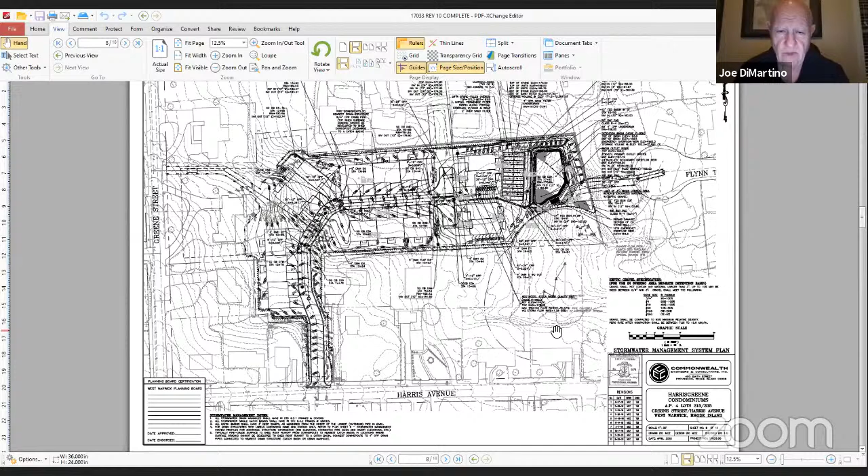Sure. So the project has gone through a number of iterations, as you can see by the number of revisions. A number of those were revisions made by the client's request to optimize the design. Other revisions were made to respond to comments from various agencies with jurisdiction, including West Warwick Sewer Authority, Kent County Water Authority, and RIDEM. I'm not sure which revision you're looking at right now, but I recall one iteration where we had a stormwater basin and then another stormwater basin, and it was tiered.

I'm going to back up a little bit to give an overview of the site itself to create some context. The topography of the site runs generally from west to east. It's fairly significant—we're on a hill. That actually made it fairly straightforward for us from a stormwater management standpoint for collection and conveyance. Everything is flowing where we want it to.

As Sandy alluded to, a prior iteration of the master plan had some underground infiltration chambers and some general unengineered proposals for stormwater management. We've come back with a different configuration and different building units. That has moved everything further to the east in order to fit the various proposed units, the 16 units, and for us to locate our infrastructure—because our goal is to capture, treat, and manage the stormwater runoff from the entirety of the site, which means we need to be close to the bottom of the site.

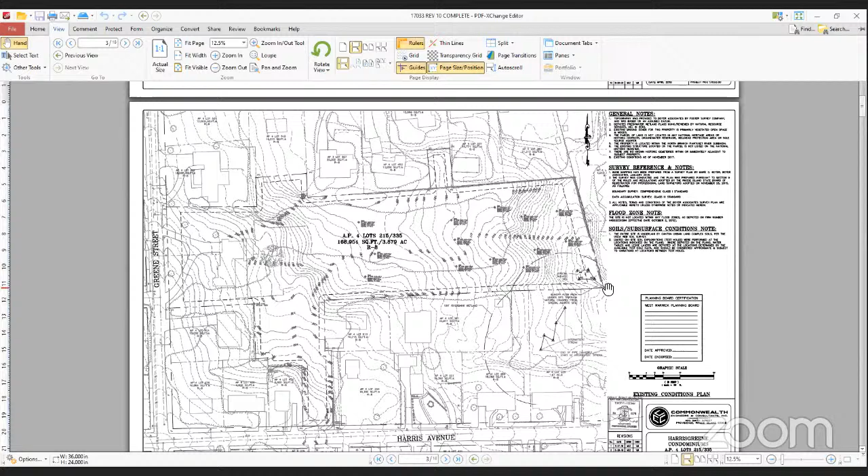The stormwater patterns are generally running from west to east, following the topography, and eventually gravitating towards this southeast corner. There's a small channel that leaves the site in the southeast corner, and off of this viewport, it runs down between the yards for, I think, 3 or 4 houses before making its way into Flynn Terrace.

So what we've done with our stormwater management—our target, or really our obligation—is that when we come in and do this development, with impervious area for the roofs, the common driveway, and individual driveways, all of that is going to generate more runoff than is currently leaving the site right now, more peak flow rate. It's going to increase how quickly that volume of water is leaving the site.

Our obligation is to mitigate that, meaning we have to at least match the current flow rate leaving the site with our proposed design. We do that by routing it through various structures and holding it up long enough so that while the storm is going on, we're building up storage in these structures, and the water is being metered out slowly at a rate less than or equal to what would currently come off the site.

So I'm going to pop over to another—oops.

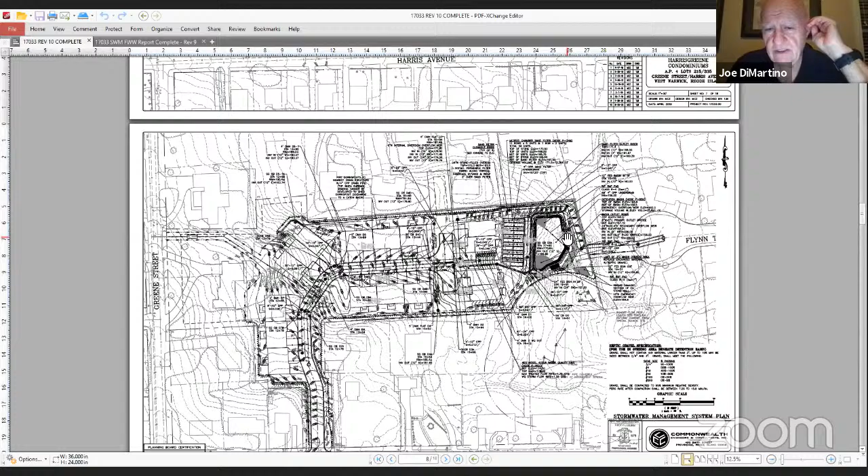Okay, well thank you Mike. The question on the eastern boundary: there was a stipulation on the original master plan approval that it was going to remain in its natural state. To me, it doesn't make sense that it would remain in its natural state, but...

I'm looking at your stormwater retention area, and it seems as though there's a pretty steep embankment east of the detention area, between the detention area and the property boundary. And you have piping going through there. I don't know, it's storm drainage, maybe sewer piping, perhaps. It's hard to see at this scale. But so my question really is at that point, right?

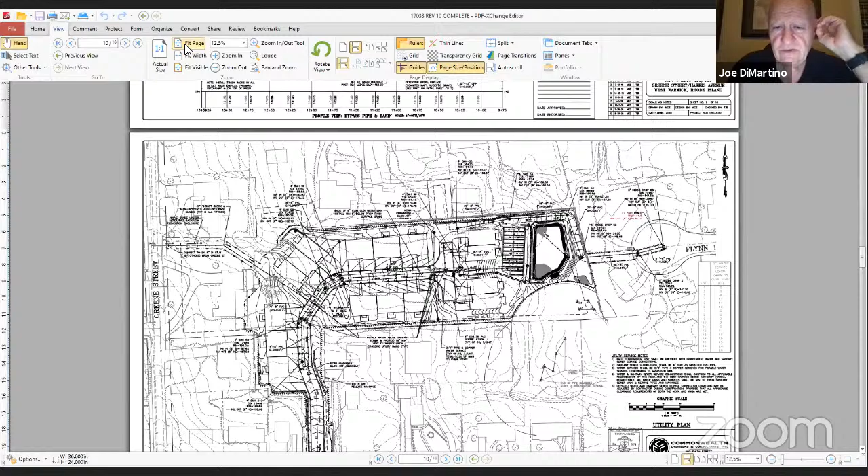Okay, all right, good, thank you. That helps. So I just want to make sure that we're consistent with what the original master plan decision required, okay? And what you have may in fact be better than what they required. I'm not sure, but I'm not sure why this was included. Again, this was done originally in 2007, 13 years ago, long before any of us were on the planning board. And so it's new to us, okay? We just need to make sure that what was on the original master plan is faithfully being honored here, okay? And so that's why I'm asking the question, all right?

Joe, if I might interrupt a moment. And subject to Mark's agreement with me, your master plan came in under a conceptual version. I think I heard him state that even the layout of the units is different this time around. So while you can accept the guidance of the master plan, as long as you stay with the basic concept, you have the ability to make modification to it. Mark, am I correct in that?

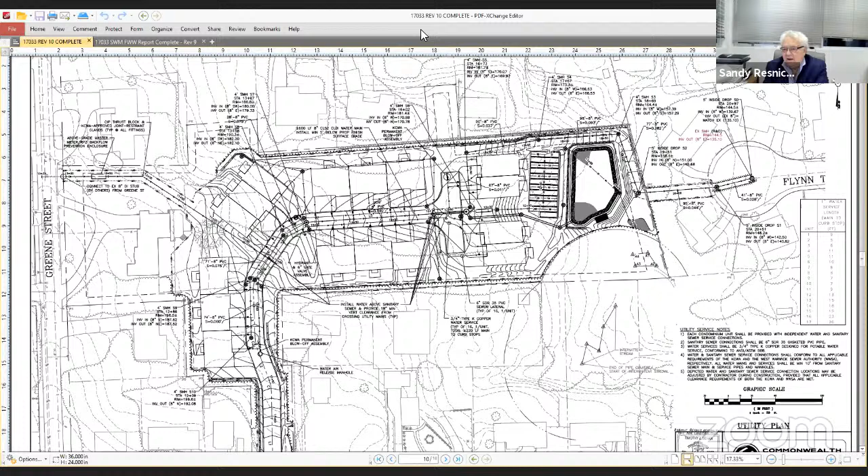And that's another example of what you were talking about, the private sewer tying into the town system. So we want to make sure the condominium—Sandy Resnick, we want to make sure the condo association has that language. It's more common than not that you'd have language like that in a condo association to give it the right. So that's not an issue.

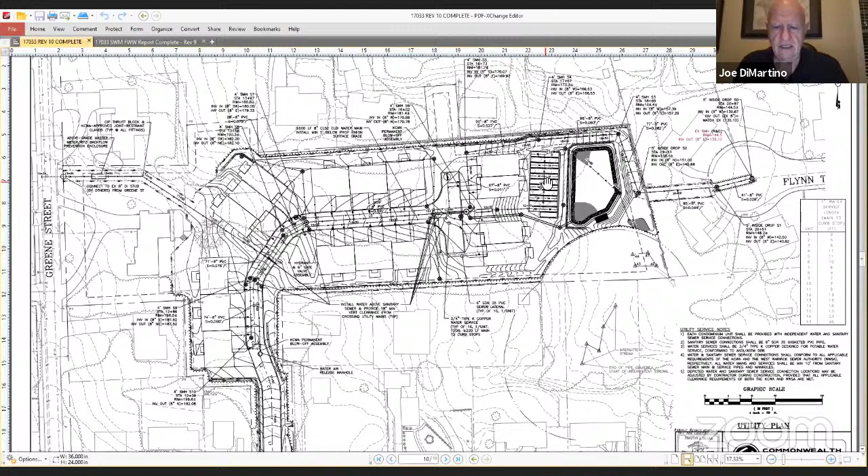Okay, great, Josh, do you... should I stop sharing my screen and turn it back over? Anyone else on the board want to continue to see the shared screen? Well, I do have a quick question. Okay, Josh, go ahead. No, this is Joe Gardosic. Oh, I'm sorry, go ahead. Can you guys hear me? I can hear you, it's coming through on your phone I think, Josh. Oh okay, yeah so can you hear me? Go ahead, Joe Gardosic, go ahead.

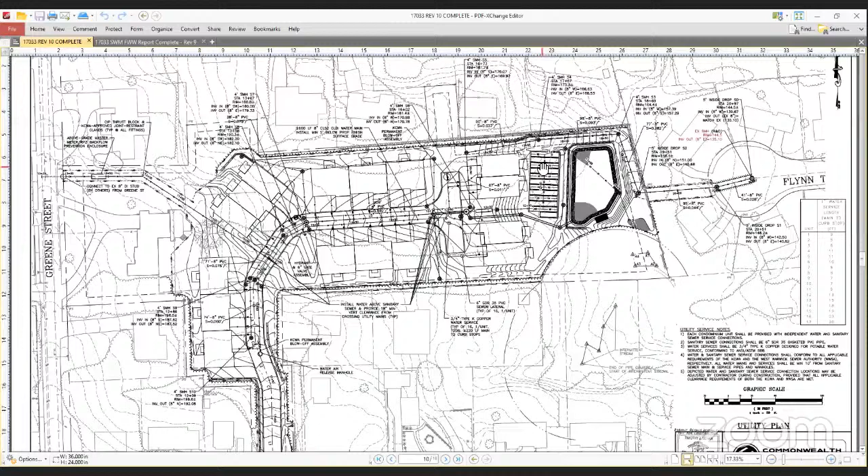Mike, do you have a feel for how much ledge may have to be removed at the sand filter and the detention area? It seems like there's a lot of ledge on this property. There is an appreciable amount of ledge underlying the site, and a good amount will need to be removed, particularly in the sand filter area. It flattens out a bit elsewhere so we won't have as much there, but there will be some rock removal in this area. We don't really know at this point the nature of it—whether it's hard ledge or rotten rock—but test holes have located ledge.

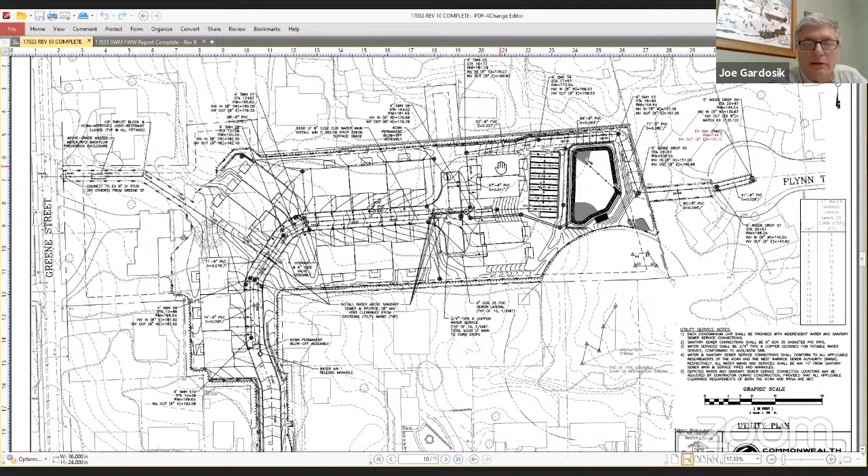Do you have a feel for quantity—500 yards, 800 yards, 1,000 cubic yards? I can get that for you. I don't have it off the top of my head and don't want to give you an incorrect number, but that's certainly something I can derive. We've got profiles and sections through the entire site, so I can come up with an approximation for you.

So Mike, my assumption is that the units will not have basements, but will be slab on grade? That is correct—we're not looking to go down any further than we need to.

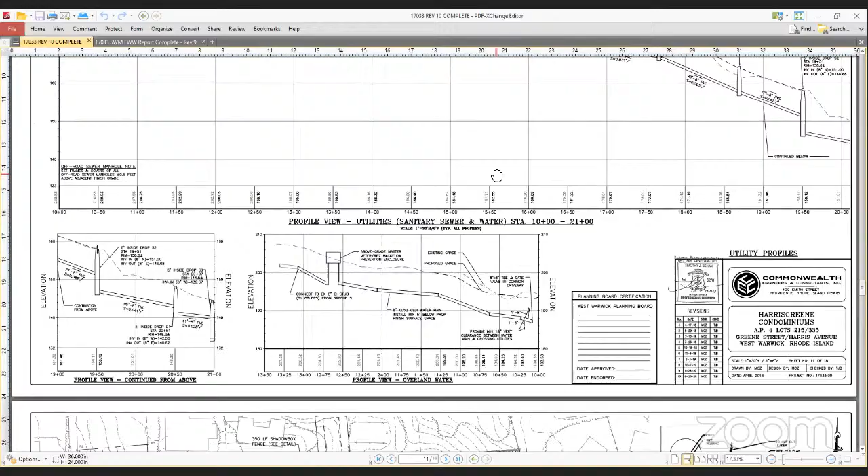All right, Josh, were you trying to get in? Yeah, I'm looking at sheet 17 of 18, at your Redi-Rock wall installations—that's my biggest concern, the manholes and obstructions near the Redi-Rock walls.

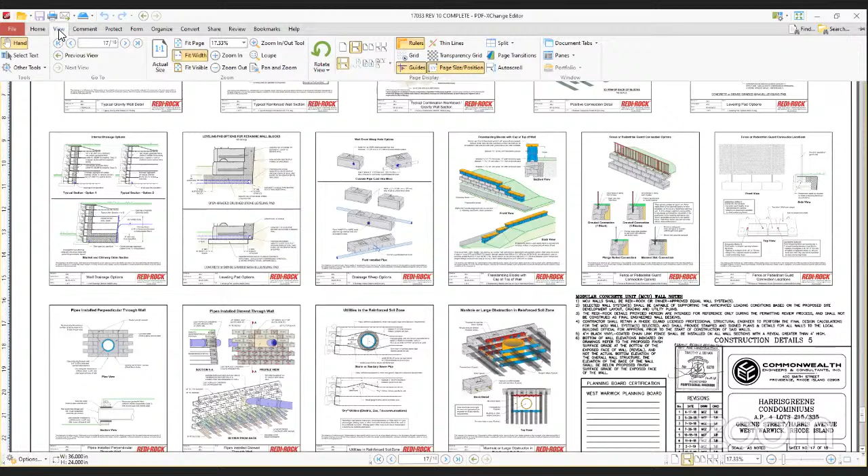I mean, it's standard, but I see more failures of walls than anything else. And with ledge being there and the retention of water, is that to be construed as the Redi-Rock wall being built around near the retention, further away?

Well, I'll go back to the plan sheet and show you where we've got that. The first thing I'd say is that Redi-Rock is a suggested system, not necessarily the one the developer will end up using. We present it because it's pre-engineered, and they have different details for various conditions and configurations.

So, how acidic is the soil around there? Have we done soil samples? My concern is that most Redi-Rock walls that fail do so because there's deterioration of the parts that hold it together, and then you get a good boatload of rain, and there's a failure of that wall.

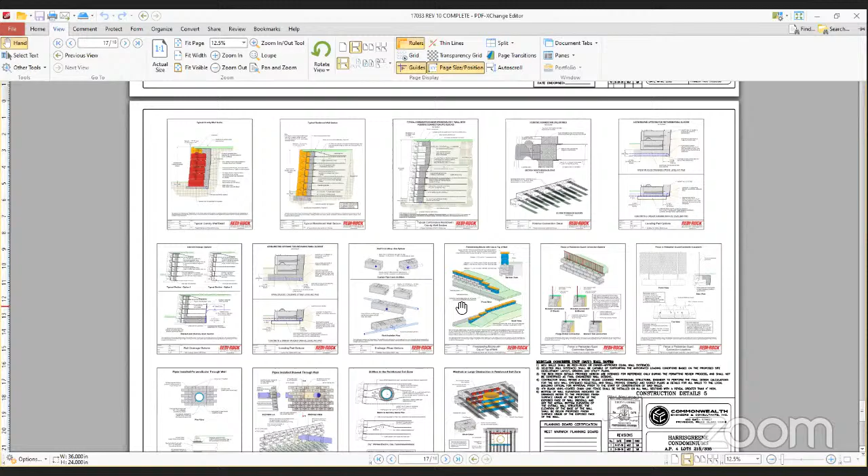I don't know if this is the point where I can be talking about this, but it's a concern. Looking at the material makeup on some of the details, it doesn't make me feel warm and fuzzy that some of that galvanized material, if scratched, can corrode away. When those rods corrode and you get heavy rains, you can have a failure not only of the system, but a failure of the wall. I don't know, I've just seen it happen all too often.

I don't know if this is the forum where we can talk about this, but now you're saying you might not use this system, you might use another engineered system. I guess it was just a question, because I don't think some of those rods and materials used are going to last long, depending on how acidic the soil is.

Go ahead, Mike. That's not generally something we do advanced testing on, the acidity of the soil. It's not to say it can't be done, but it's not something we've done already on the site, so I can't tell you if it's particularly acidic or not.

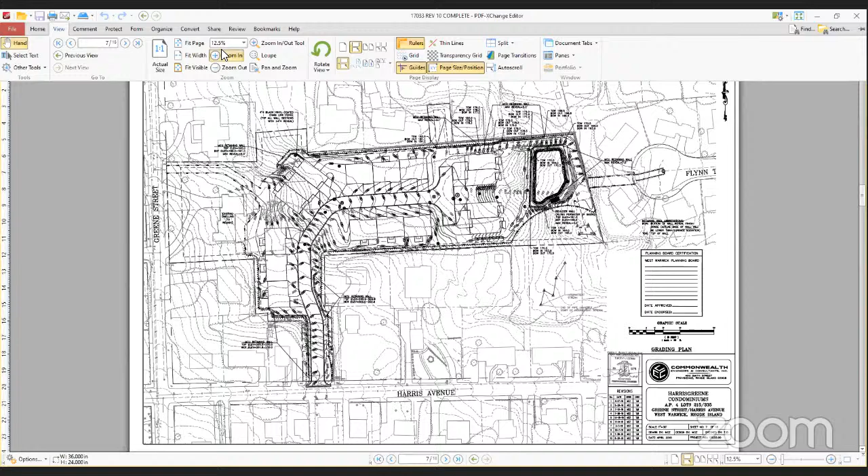I can say that I'm on the grading plan now. I'm going to zoom in a little bit. So on the grading plan, wherever you see the term MCU, that stands for Modular Concrete Unit Retaining Wall, and Redi-Rock is one of those types of systems.

So it's basically blocks that you put in. If you look at the plan, you can see where we've proposed to put them where we need to. I've got them only where I need them, because if I tried to grade out with just natural material without a more vertical surface or face, I would go beyond the limits I wanted to establish.

So I've got one along here, along the driveway. You can see, looking at the elevations, TOW is top of wall, BOW is bottom of wall. Generally speaking, we're not talking about tall walls, really. They're fairly modest through that area.

So as a general rule, they don't have any of those reinforcement materials exposed. Something significant would have to happen in order to break the rock and expose that.

Okay, we have another one over here. Again, we're looking at modest sized walls, generally. We've got one along here, one along here. So we're talking about 4 to 5 foot high walls, not the massive ones you might see, like the one that fell over.

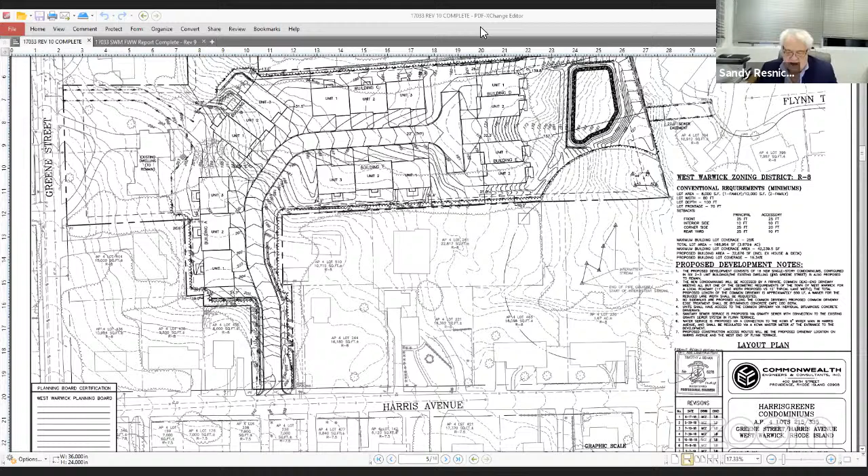Okay, so Sandy, you got more? I do not. Okay, all right, thanks. We're certainly open to any questions.

So I just want to ask if there's anyone that wants to speak, it's a public hearing, you've presented your case. Does anyone want to speak in opposition to this development or this plan? Actually, the development has to be, the master plan was already approved, so anyone wants to speak in opposition to this? You have a couple members in the public, Joe.

Okay, Toby is the first one. You want me to allow them to talk first? Sure, let Toby talk. Okay, Toby can unmute himself. Good evening, how are you? Good, thanks. State your name and address, please. Toby Miller, 44 Woodside Avenue. Swear to tell the truth, the whole truth, and nothing but the truth? Yes, sir. Thank you. All right, Toby, go ahead.

My question was in regards to the 10-foot buffer. I see and understand that there's going to be a retaining wall on the north side of the property running eastward down to the new water recovery system. And I'm curious, my question regards the 10-foot buffer area. I understand there's going to be a passageway or a driveway for maintenance. What was that planned to look like?

This is Mike again. Toby, so that goes back to a question that Mark had raised about what the material for that access path would be. I'm going to call it an access path because when you say driveway, you get an immediate image of something paved or gravel. That access path is going to look like an extension of the lawn area, and it will be uniformly graded, so you'll see it sloping down, but it will look like grass and be mowed regularly.

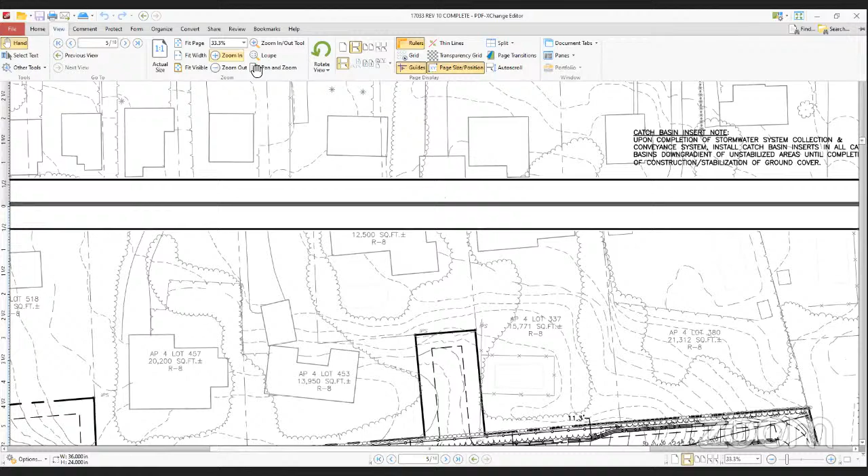So we've got a retaining wall here, and I don't have the grading plan. This is the layout plan, but I can go to the grading plan to give you an idea of how high that wall is.

And then we are proposing, and will provide, Justin would provide the shadow box fencing along here. As you can see, there is some room, and the fencing location, there's nothing set in stone about that. So it would be possible to locate this closer to the back of that wall and then put in some plantings between the fence and the property line.

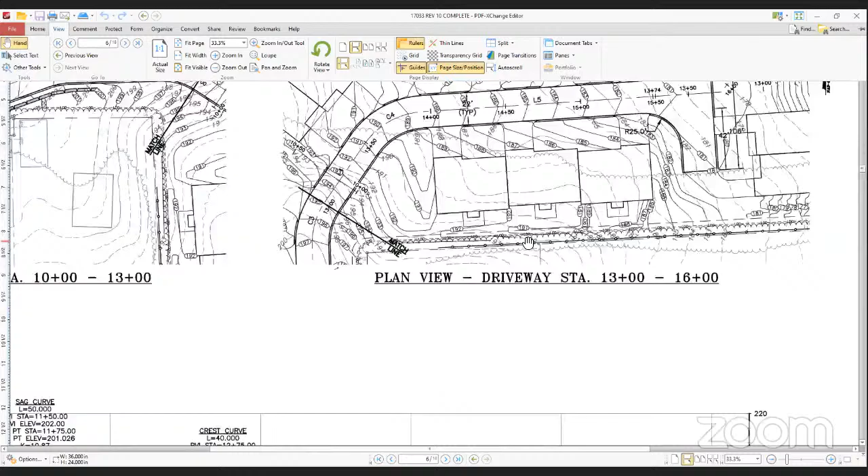So I guess what I'm saying is we're showing what the intent is, but the more detailed application of that intent can certainly be worked out between, and Justin, tell me if I'm wrong, but I think you've made it pretty clear that you're user-friendly and willing to talk to people and work with them so that they are ultimately satisfied. I've gone as far as giving some or all of the neighbors with the abutting property lines a credit at my brother's nursery, which is Willscape, and I'm more than willing to accommodate anybody's desires up to certain species types, as long as it coincides with something uniform with the development.

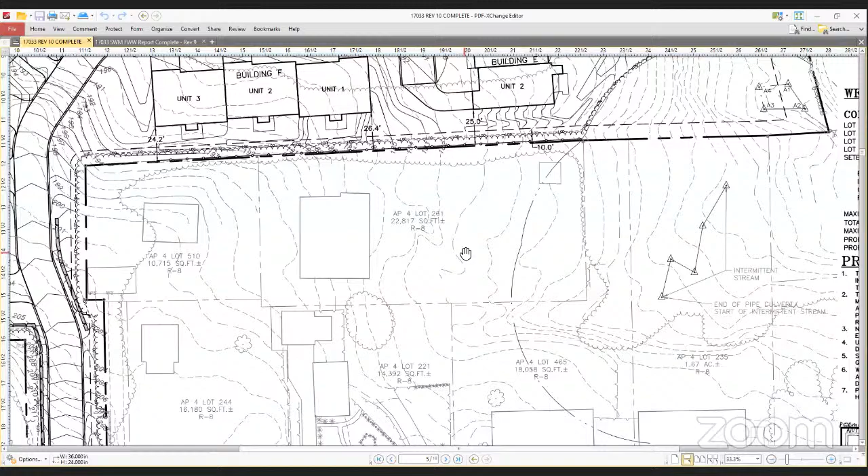I'd also like to state, if you look at that - Mike, if you could stop moving around - sorry about that, if you're trying to find the grading plan. If you go back to that area, you'll notice there's an existing, and Mike, correct me if I'm wrong, but I believe that's the existing boulder wall that is there.

And I think if you see the circles, there's an existing... no, well, yes, those, right there. If you look at those slightly gray connected ovals - yeah - so that's an existing boundary that encompasses most, a lot of the property.

And you'll notice that we're on the 45 Greene Street side of that significantly, and we will respect that and our neighbors.

Okay, yeah, I've spoken with Justin. We're working fine, so I'm just curious how it's progressing. Okay, all right, thank you, Toby.

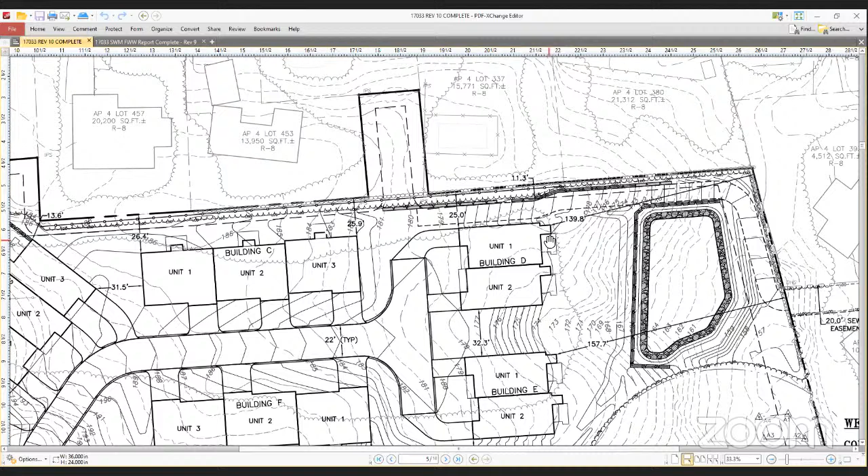And we have... if I could, only because I was looking into the water discussions. I've openly commented previously at the meetings about the water runoff, and I understand everything that was said today. So just from a point of interest, today my French drain at that residence on 44 Woodside runs every 11 minutes, and I understand we've had an excessive amount of water in the past 2 weeks.

What would your expectations be with this new collection system? Would that be drawing from the ledge, or is that basically surface water that you're capturing? Well, we're capturing surface water, but somebody else had asked the question about the ledge removal, and we know we have ledge in this area that's going to be coming out. Theoretically, the removal of the ledge might create a

flow path where it would serve to help. Now, I'm not going to tell you that your French drain system is going to run less frequently, but it is possible that the underground water patterns here might be slightly improved because we're taking out some of that ledge and incorporating some of this treatment.

But I'm also looking here and I see what appears to be a bit of a ridge. I don't know, is that a garden or a raised bed of some kind, or? That's a built-in pool. Okay, so this is built up a little bit. So as far as the surface runoff is concerned, some of it would be coming down. Actually, it looks like it's all breaking back toward Woodside through here. That's correct, yeah.

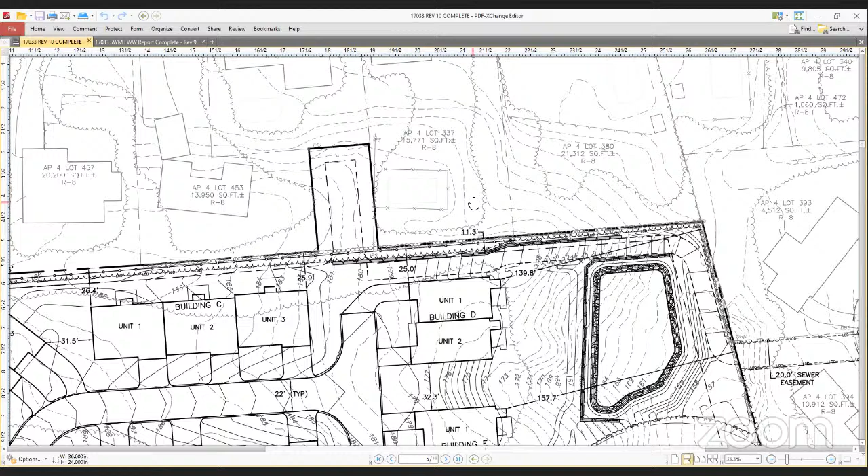Yeah, I think it's a tough area. You've got a lot of ledge, you've got perched water tables, and that's the reason you have a French drain, and I think that's the reason why you're seeing it run so frequently. Okay, because of the ledge, yeah.

Okay, Toby, anything else? Not at the moment, thank you. Okay, thank you. And we have another individual who wanted to

speak out? Yeah, Stephen Sheridan would be next. Okay. All right, Stefan.

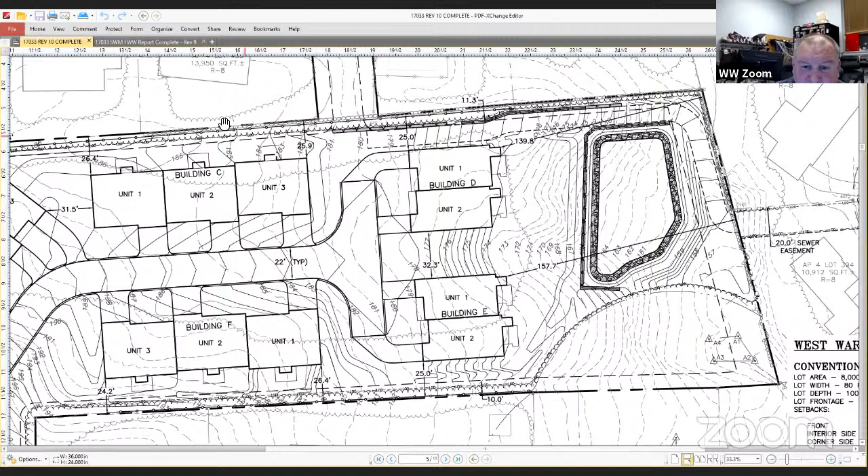Okay, Stefan, hi guys, how do you want to swear? State your name and address, please. My name's Stephen Sheridan, I live at 11 Flynn Terrace, West Warwick, Rhode Island. Okay, swear to tell the truth, the whole truth, and nothing but the truth? I do.

Okay. Go ahead, Stefan. You're on.

My problem with this is I already have a high water table on this side. I'm at 11, which is just past that area that's not to be untouched, towards the Harris Avenue side of that retention area. As you can see, the topography there all comes down towards me. I also have an easement through my property, which hasn't been maintained by the town for who knows how long. The footprints of buildings put in above and below me over the years have changed the water table dramatically, so now I continuously have water running through my basement. I also have a French drain which runs every 20 seconds.

Ever since this last rain we had, the pipes in the back that run through the easement can't handle the water that comes off from Harris Avenue any longer. So that comes over the berms that were put up there, and now runs like a river over the top as well as through, pulling my topsoil off and depositing it right at the end of the pipe, which I dig out myself every year. I don't think I'm supposed to be maintaining that, but I'm sure that's a separate issue.

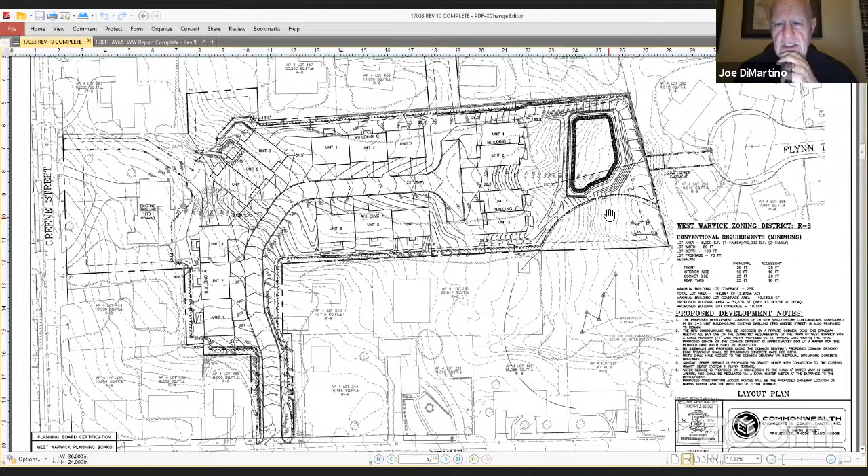Well, the peak flow rates are definitely going to be reduced. So when we have those storms coming through and water is running down and getting into these structures, the flow rate is how quickly the water is running out, how quickly that volume leaves the site. That's going to go down. There will be an increase in the overall volume, but again, that volume is going to be coming out slowly relative to what is currently leaving the site during those storms.

Now, Stefan, you and I spoke at the neighborhood meeting and talked a little bit about what's going on in the neighborhood. Can you see the screen right now and where the little hand is? You're down? I can. Okay, so you're one house further down, I think, aren't you? I'm one more back. Okay.

So your backyard is certainly getting outflow from our site, there's no doubt about it. It comes down through this little special aquatic feature, leaves through the southwest corner through that channel, and joins runoff coming from offsite areas off of Harris Avenue. There's an intermittent stream that runs back here that was identified. It almost looks like there was an underground stream through here, or a stream at one point, that pops out onto the surface before it dives back down again, which is why you have this somewhat odd shaped intermittent stream, and it stops, just disappears where it goes back into the ground.

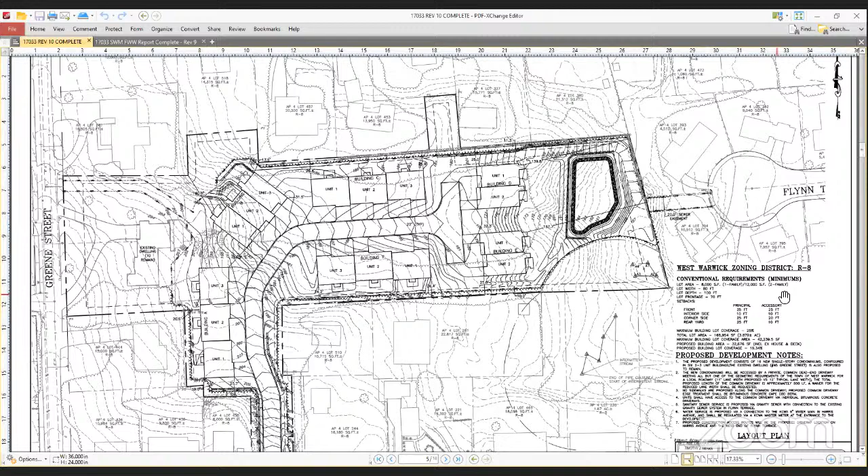The other thing that we started to broach and talk about at the meeting was Justin is a contractor, and Justin, jump in if I'm speaking out of turn, but if it looks like there is some improvement that could be made off-site, within reason obviously, to try to formalize and provide that runoff with a way to go where it wants to go, there may be some discussions that could be had between you and the developer.

Okay, I'm hearing that, but my point was, talking with you, with the town's own admission, that the infrastructure cannot handle the water that's coming off now. So that's why you cannot tie into that system. Am I correct? Because that's what we had talked about.

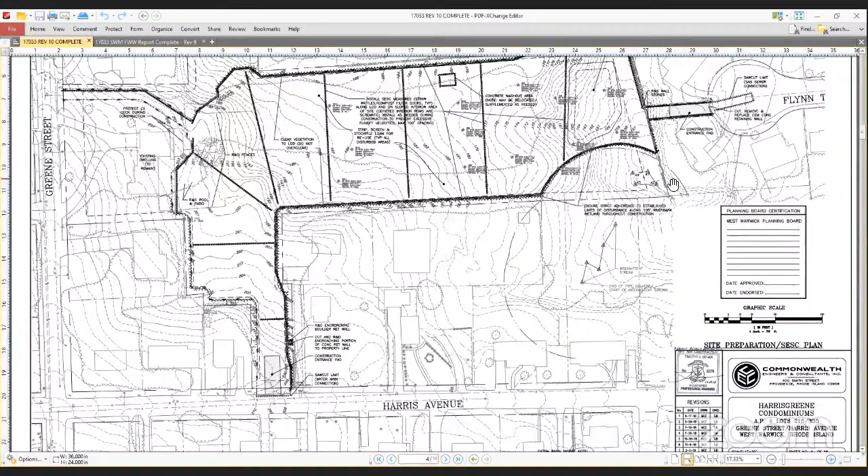Yep. I'm going to go up to the locus map. Hold on, bear with me. I think that'll be a little bit more enlightening. Let me zoom in—it gives you a slightly wider view of the area.

All right, Stefan, this is you opposite the road coming into Flynn? Keep coming up. Right there? One more. That's me. Okay.

So what we've talked about, this is it - where the easement goes through. So this is our site. We've got runoff coming down here from the site to this corner, and we've got runoff coming in this direction. It's all aiming and running in back here, and then eventually it comes down and makes its way across these properties into Flynn Terrace.

We did evaluate - we went out and looked at the catch basins in Flynn Terrace. There's one here at that corner, as I recall. There's another one down at the other end of the barbell. There's one catch basin up in here in front of that house. The piping connecting those structures and running down appeared to be 8-inch, which isn't unusual, but it's probably about the same vintage as that old mill sewer line we were talking about earlier. It's certainly not capable of handling all of the runoff.

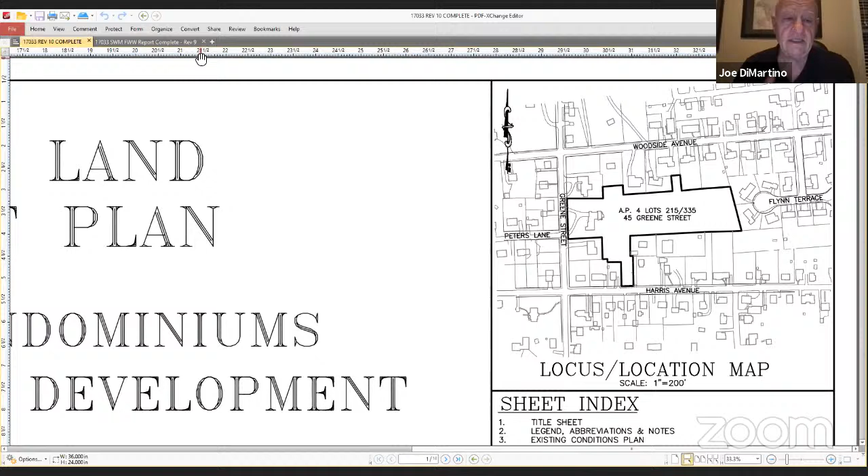Stefan, we have to make sure that we're not adding to your problem, okay? But we can't go solving everybody's problem that's outside of this property. So I'm comfortable that what the developer is talking about here is not going to add to your problem. It could actually minimize it a little bit, but it won't make it worse.

It's going to retain water and increase the groundwater level. I suspect not, but because it's coming to me, instead of running off, I'm getting more. Okay, heard your point, thank you.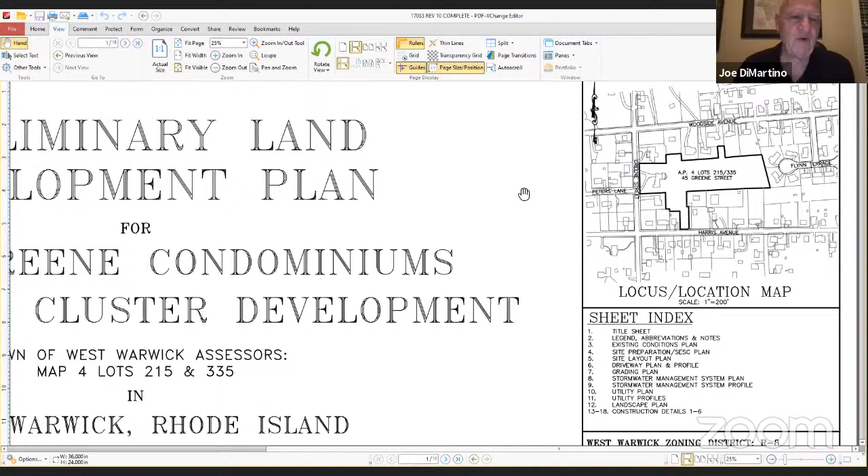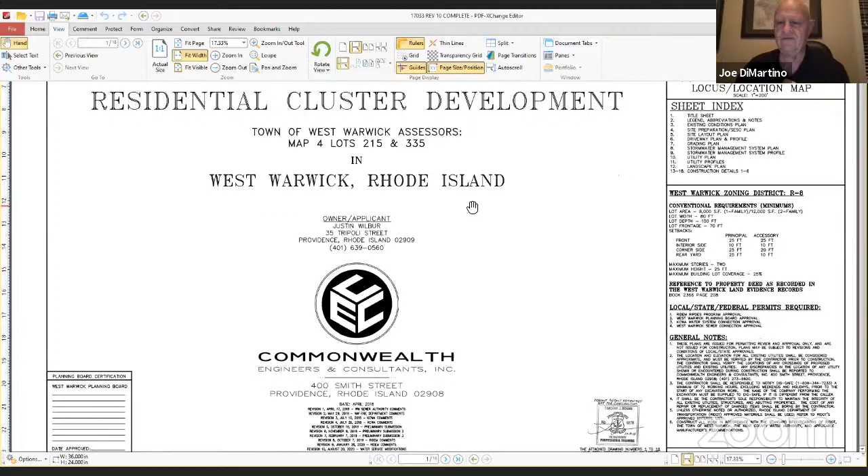Thank you for your contribution, Stefan, and we'll consider it. We'll have further discussion after the public has been heard. Is there anyone else waiting to speak? We have one more, Joe.

Lynn and Rob from 77 Harris Avenue. Okay, all right, Lynn and Rob. Yes, can you hear me? Yes, we can. Could you state your names and address, please? Yep, my name is Lynn St. Germain Lund, and I live at 77 Harris Avenue, West Warwick.

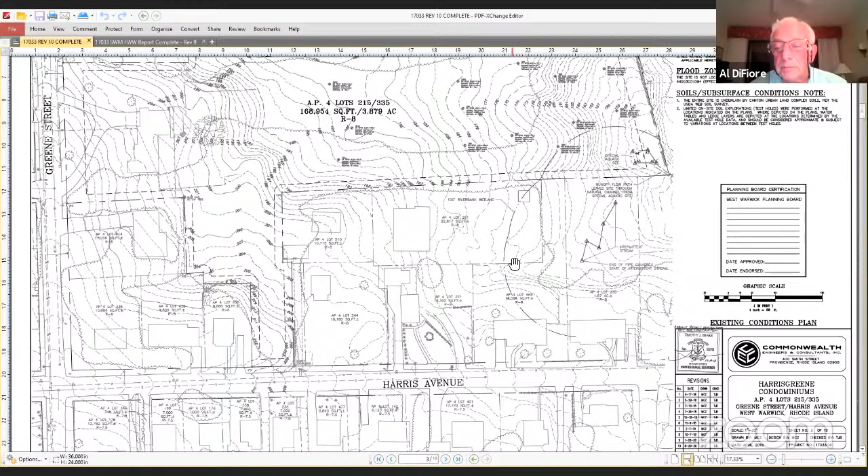And Rob? Rob, is Rob with you, Lynn? Yep, he just said his name. Did you hear Rob too? Okay. Do you both swear to tell the truth, the whole truth, and nothing but the truth? Absolutely. Thank you. Okay, Lynn, go ahead.

First of all, I'm a little disappointed that the planning board years ago approved this, because I don't think it fits in the neighborhood. This is an older neighborhood, and to add brand new condos, I think is doing a disservice to the style of the neighborhood.

I also think that not allowing these condo owners to have visitors or parking, even though there is going to be limited parking at 45 Greene Street, is also doing a disservice to the people who are going to be buying these condos. So either they're not going to buy them, or their people are going to park on the street that's not wide enough to get emergency vehicles in, or they're going to park on Greene Street and Harris Avenue, which is going to interfere with the rest of the neighborhood. I'm a little concerned about that too.

And then my third thing is, is Justin still on? Yes, I am. Okay, hi Justin. Hello. One, I had sent you an email after our visit, after our town meeting in July.

I had asked you in the email to get me where the builder had built some of these condos before, and I never got a response, so I'm a little disappointed with that too. I don't recall seeing it. There's a good chance I just might have missed it, and I do apologize for that.

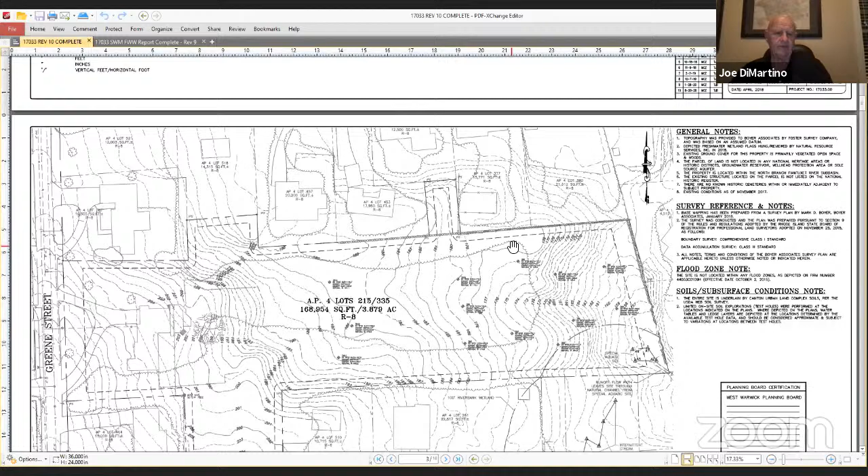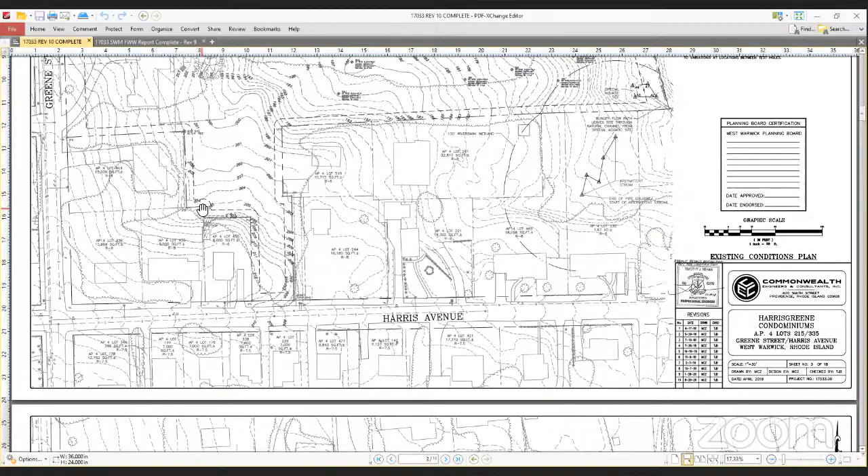Let's take a look at the plan, and Mike, maybe you could help point out where her property is and what property line Lynn's talking about. Sure. So which is your house? Two after the entrance going west, lot 435, going up the hill. Okay, hold on a second. I see, so is this your property? That is. If you see all the way in the back corner, ours is the closest of any other property. I'm going to go down to the layout plan that shows where the buildings are and some dimensions. Let's take a look at that, I'm going to zoom in. Yeah, it's probably the 10-foot setback.

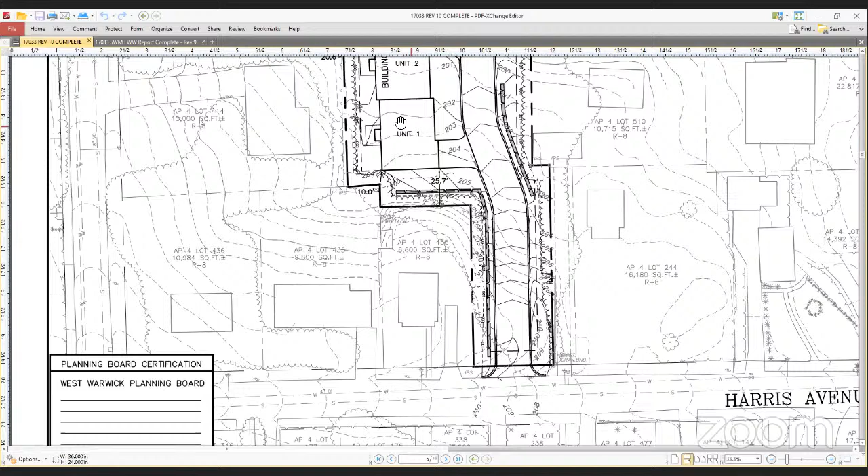Yeah, it looks like you're right on my line, or darn near it. Unit 1 would be the closest to mine. So this is Unit 1 in Building A, and it is right at that corner point. That's a 10-foot zoning setback, so that corner of the building is going to be right at the setback line. Okay, and that is what zoning requires. That's correct. Yeah. Okay.

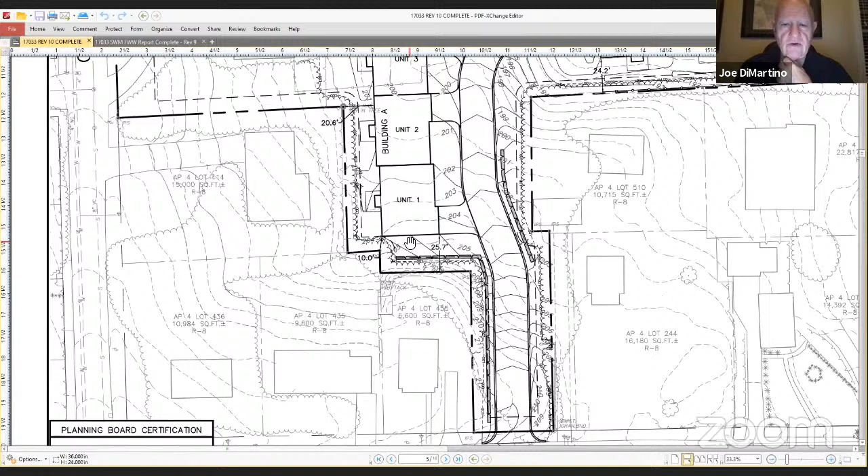Okay. So Lynn, you all set? Nope, my husband was just asking, I guess you didn't hear him.

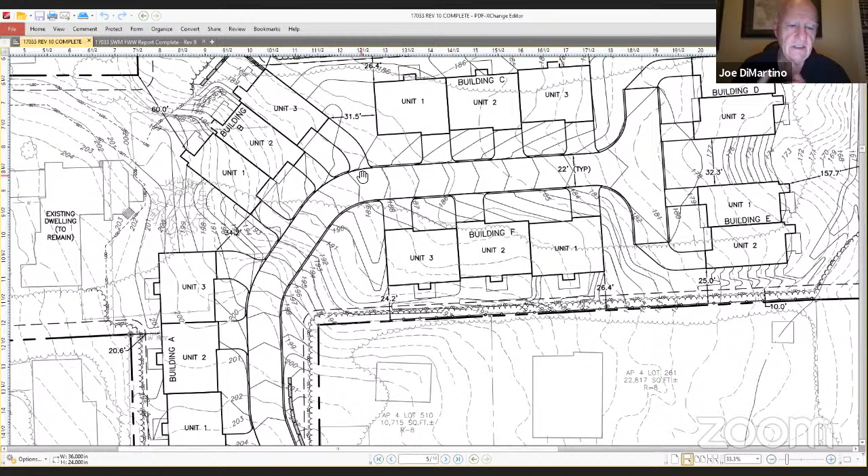How tall are the buildings going to be? Good question. Mike or Sandy, how tall are the buildings going to be? Are they two floor, two story, or single? I think that's a Justin question. They're all ranches, one story. All single story, okay. The plan would be to have higher ceilings on the inside where appropriate, so it might be 8 or 9 foot ceilings, but it is one story. One story buildings, okay.

Good, very good. Okay, Lynn, anything else? Nope, I think I'm all set. Thank you very much. Thank you.

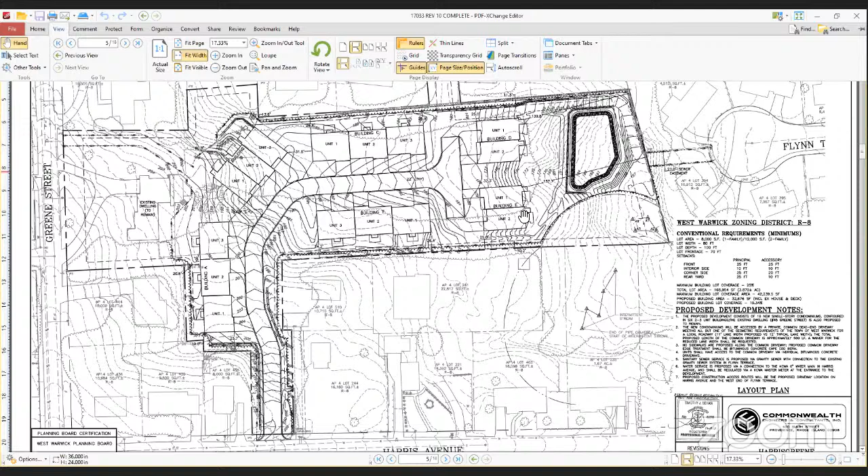Okay, anyone else? I would also like to add, while I'm on the record, if you look at building E and building D, those may have walkouts in that area because of the nature of the way that works. So those could have a walkout in the back, but that is it. They're actually, they do contemplate that. If you look at these contour lines coming down, we do have a slope down on each side of the building, and then in between that would allow us to have a walkout level behind.

All right, so no one else, right? Waiting to be heard. Okay. Appears like no one. I would. No, Joe, you're good, everybody's had their questions answered. Okay, great, thank you.

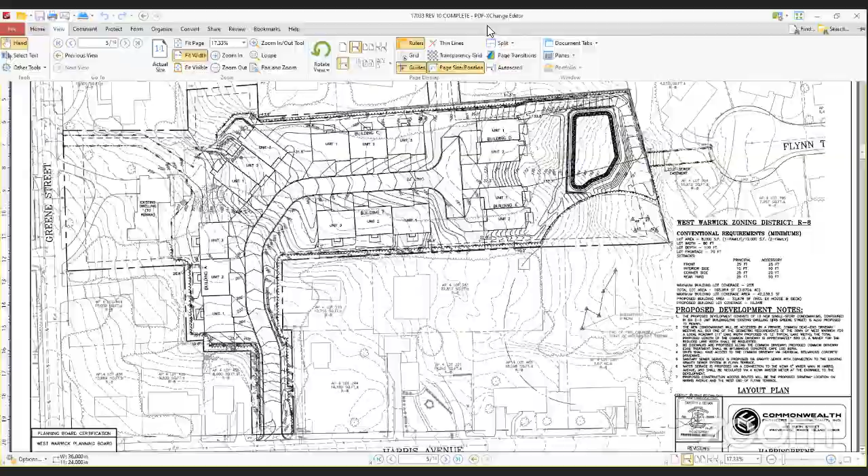So I'll entertain a motion that we close the public hearing. I'll move that motion, Josh Barrett. Justin, is there a second? I second. Okay, Joe Garcia. All in favor? Aye. Aye. So the public hearing's been closed.

Now let's talk about discussing approval or not, or whatever. Mike? Joe, I had another question pop up that was typed in as you were taking that motion, if you want to hear it. A gentleman, Chuck Cloutier, typed in and said, will blasting or jackhammering be discussed in this meeting?

I wasn't planning on discussing it, but Justin's still with us, so maybe he can talk about it. Hello, I'm going to defer to an expert here that is able to speak on that if needed, if there's anything specific. But there was going to be no general comments made unless there was a question.